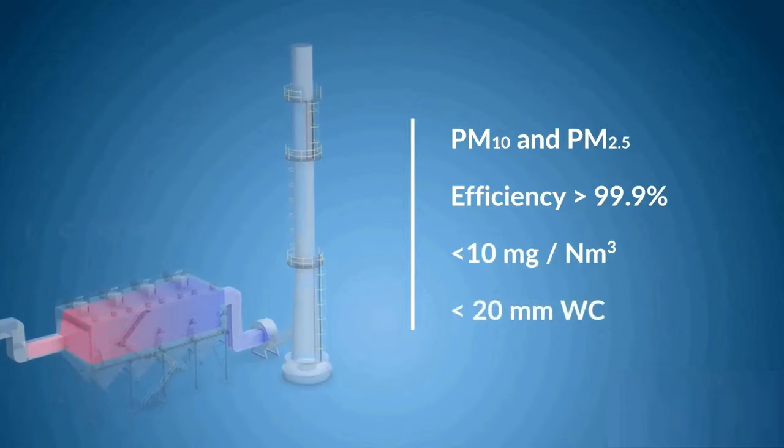Working of electrostatic precipitator: an ESP works because of electrostatic attraction - like charges repel, unlike charges attract. An ESP uses a high voltage electrostatic field to separate dust, fume, or mist from a gas stream.

The precipitator consists of vertical parallel plates forming gas passages 12 to 16 inches apart, or 30 to 40 centimeters. Discharge electrodes are electrically isolated from the plates and suspended in rows between the gas passages. Every particle either has or can be given a charge, positive or negative.

A high voltage system provides power to the discharge electrode to generate an electric field. The particulate entrained in the gas is charged while passing through the electric field. The particulate is then attracted to the grounded collector plate and forms a dust layer on the plate. Periodic rapping separates the accumulated dust layer from both the collector plates and discharge electrodes. The dust layer released by the rapping collects in the hoppers and is removed by material handling.

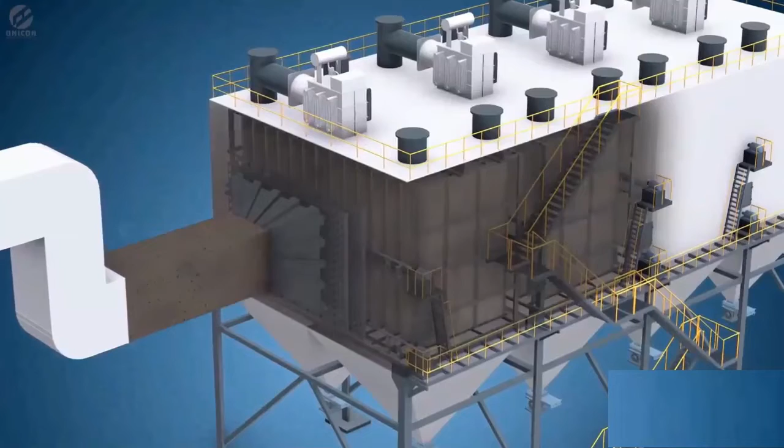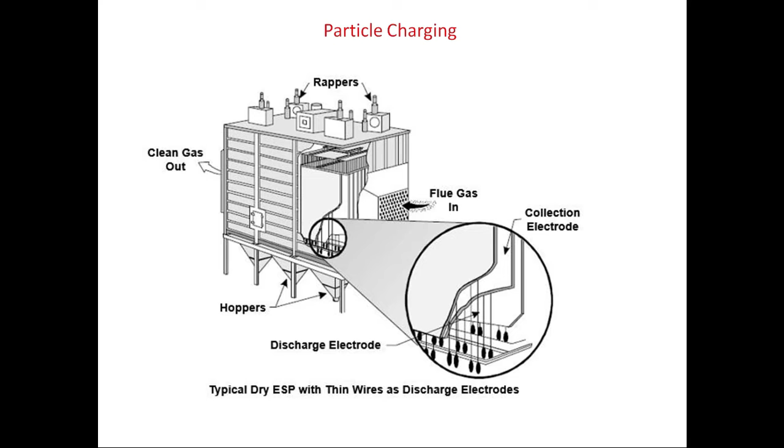Particle charging: typically a dry ESP has thin wires as discharge electrodes, which are evenly spaced between the large plates called collection electrodes, which are grounded. An electrode is something that can conduct or transmit electricity.

The particle charging process begins in the region around the discharge electrode. Free electron generation: several things happen very rapidly in the small area around the discharge electrode. The applied voltage is increased until it produces a corona discharge, that is electric breakdown of the gas, so it gets transformed from an insulating to a conducting state, which can be seen as a luminous blue glow around the discharge electrode.

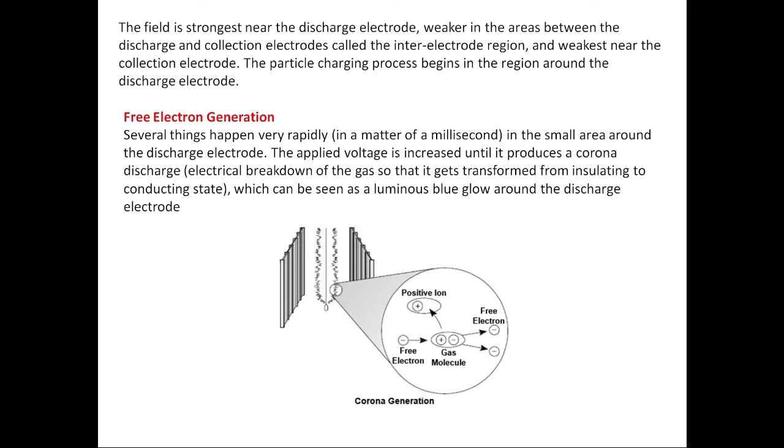The free electrons created by the corona rapidly move away from the negative electric field because it repels them. They move faster and faster away from the discharge electrode. This acceleration causes them to literally crash into gas molecules, bumping off electrons from the molecules.

As a result of losing electrons, the gas molecules become positively charged, that is, they become positive ions as shown in the figure. Thus the gas molecules are ionized and electrons are liberated. This activity occurs very close to the discharge electrodes, and as shown in the figure, this process continues, creating more and more free electrons and more positive ions. The name for all this electron generation activity is avalanche multiplication.

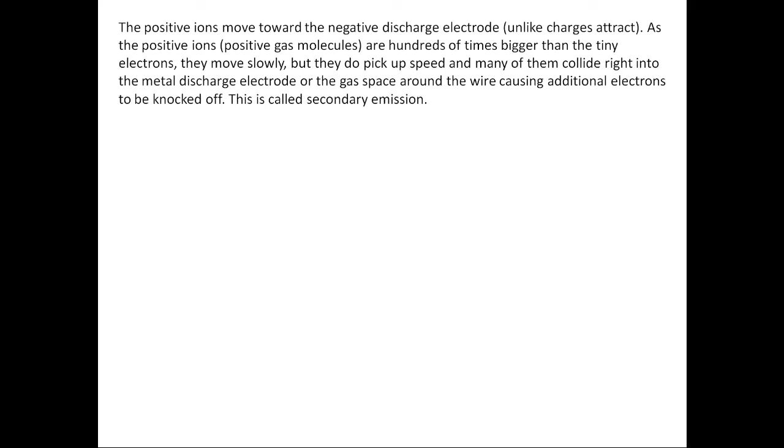The positive ions move toward the negative discharge electrode. As the positive ions are hundreds of times bigger than the tiny electrons, they move slowly, but they do pick up speed, and many of them collide right into the metal discharge electrode or the gas space around the wire, causing additional electrons to be knocked off. This is called secondary emission.

Ionization of gas molecules: as electrons leave the strong electrical field around the discharge electrode, they start slowing down. In the interelectrode area, they are still repulsed by the discharge electrode, but to a lesser extent. They collide with gas molecules in the interelectrode region also, but instead of violently colliding with them, the electrons bump up to gas molecules and are captured by them, as shown in the following figure.

This imparts a negative charge to the gas molecules, creating negative gas ions. You can see in the picture the formation of negative gas ions in the interelectrode region. Because the ions are negative, they move in the direction opposite to the stronger negative field, along the path of invisible electric field lines, toward the collection electrode.

These negative gas ions play a key role in capturing the dust particles, as explained in the following section.

Charging of particles: the particles are traveling along in the gas stream. They encounter the negatively charged gas ions moving along the path of invisible electric field lines toward the collection electrode. The gas ions stick to the particles, imparting a negative charge to them. At first, the charge is fairly insignificant, as most particles are huge compared to a gas molecule.

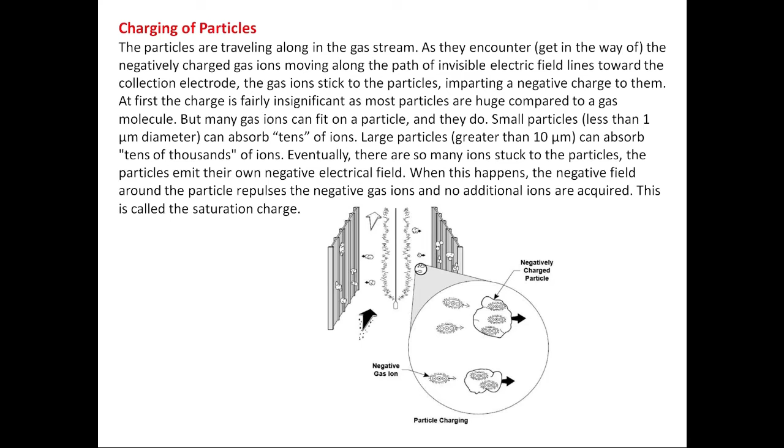But many gas ions can fit on a particle, and they do. Small particles can absorb tens of ions. Large particles can absorb tens of thousands of ions. Eventually, there are so many ions stuck to the particles that the particles emit their own negative electric field. When this happens, the negative field around the particle repels the negative gas ions, and no additional ions are acquired. This is called the saturation charge.

Now the negatively charged particles are feeling the inescapable pull of electrostatic attraction. Bigger particles have a higher saturation charge, and consequently they are pulled more strongly to the collection plate. In other words, they move faster than smaller particles. Regardless of size, the particles encounter the grounded collection plate and stick to it because of adhesive and cohesive forces, as shown in the above figure.

As more particles accumulate, they create a dust layer. This dust layer builds until it's somehow removed.

Particle charging mechanisms: the particles are charged by negative gas ions by one of two mechanisms, field charging or diffusion charging. In field charging, particles capture negatively charged gas ions as the ions move toward the grounded collection plate. Diffusion charging, as its name implies, depends on the random motion of gas ions to charge particles.

As shown in the above figure, in field charging, particles cause a local dislocation of the electric field as they enter the field. The negative gas ions traveling along the electric field lines collide with the particles and impart a charge to them. The ions continue to collide with a particle until the charge on the particle is sufficient to divert the electric field lines away from it.

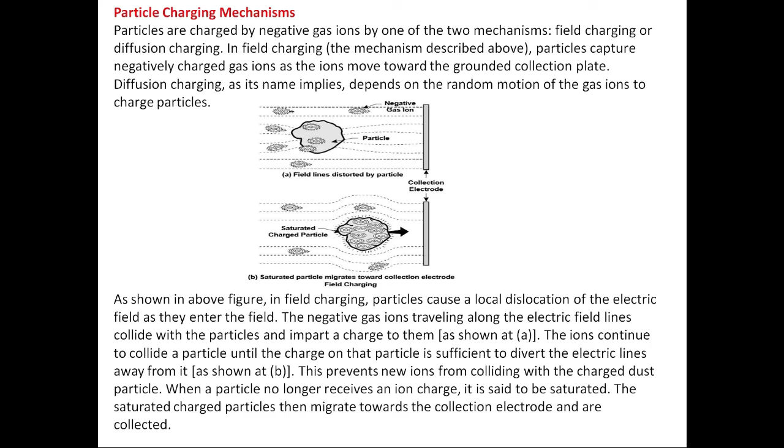Diffusion charging occurs due to the random Brownian motion of the negative gas ions. The movement of gas ions' random motion is related to temperature: the higher the temperature, the more the movement. The negative gas ions collide with the particles because of their random thermal motion and impart a charge to the particles.

In the case of very small particles, they do not cause local dislocation of the electric field. Thus, diffusion charging is the only mechanism by which very small particles become charged. The charged particles then migrate to the collection electrode. Each of these two charging mechanisms occurs to some extent depending on particle size.

Field charging mechanism dominates for particles with a diameter greater than 1 micrometer, and diffusion charging mechanism dominates for particles with a diameter lesser than 0.1 micrometer. A combination of these two charging mechanisms occurs for particles in the range between 0.1 and 1 micrometer in diameter. The third type of charging mechanism, responsible for very little particle charging, is electron charging.

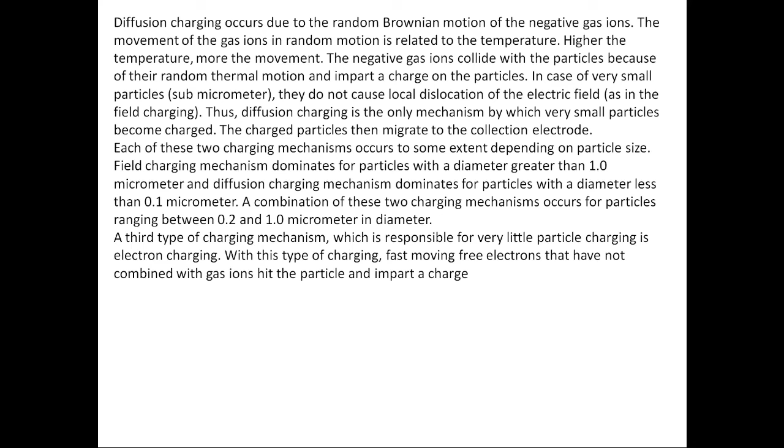With this type of charging, fast moving free electrons that have not combined with gas ions collide with the particle and impart a charge.

Electric field strength: because of the high electric field applied to the ESP in the inter-electrode region, the negative gas ions migrate toward the grounded collection electrode. This forms a space charge, which is a stable concentration of negative gas ions in the inter-electrode region.

The increase in the applied voltage to the discharge electrode will increase the field strength and ion formation until spark-over occurs. Spark-over refers to internal sparking between the discharge and collection electrodes.

Sparking is a sudden rush of localized electric current through the gas layer between the two electrodes. Sparking causes an immediate short-term collapse of the electric field. For optimum efficiency, the electric field strength should be as high as possible.

More especially, the ESP should be operated at voltages high enough to cause some sparking, but not so high that collapse of the electric field occurs too frequently.

The optimum ESP voltage is achieved by an automatic voltage control, or AVC. The AVC varies the power to the transformer rectifier set in response to signals received from the precipitator and from the transformer rectifier itself. The ideal AVC would produce the maximum collecting efficiency by holding the voltage on the precipitator electrodes at a value just below their ever-changing spark-over voltage.

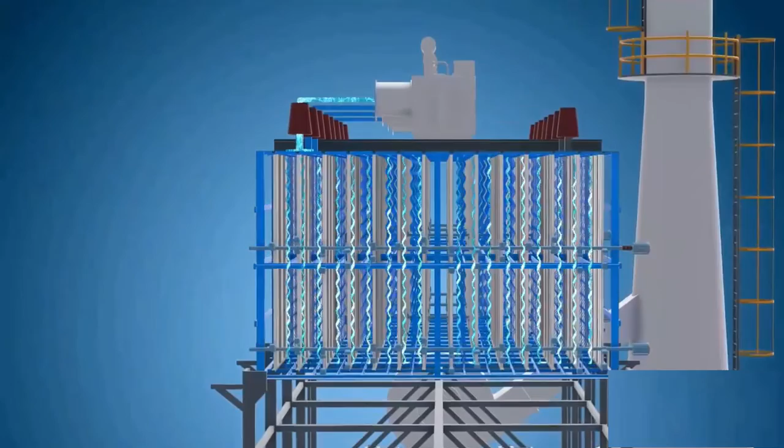What is rapping? Rapping is a process whereby deposited dry particles are dislodged from the collection plates by sending a mechanical impulse or vibrations to the plates.

The precipitator plates are rapped periodically while maintaining the continuous flue gas cleaning process. In other words, the plates are rapped while the ESP is online. The gas flow continues through the precipitator and the applied voltage remains constant.

Plates are rapped when the accumulated dust layer is relatively thick. This allows the dust layer to fall off in large aggregate sheets or clumps that fall by gravity into the hopper and are eliminated.

As the clumps fall downward, they are swept toward the outlet of the precipitator by the horizontal moving gas stream. If the clumps are too small, gravity is too slow to allow the clumps to reach the hopper before the gas stream carries them out of the collector. For this reason, gravity settling is an important step in particulate matter control in an electrostatic precipitator.